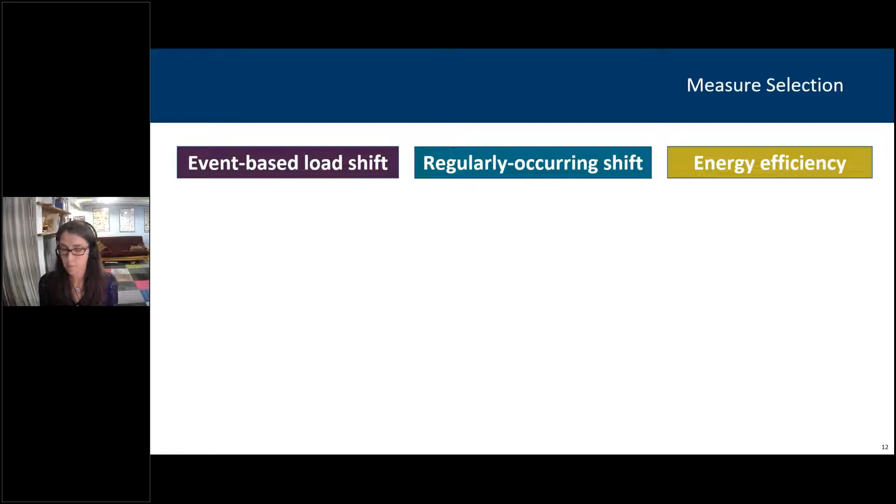An event-based demand reduction measure is one that sheds energy on select days at select hours. For example, with smart thermostats and demand response control, a utility can call an event that reduces the cooling in a person's home for a set period of time. These events aren't typically called daily, but rather a number of times throughout the year, and more detail on that in a second.

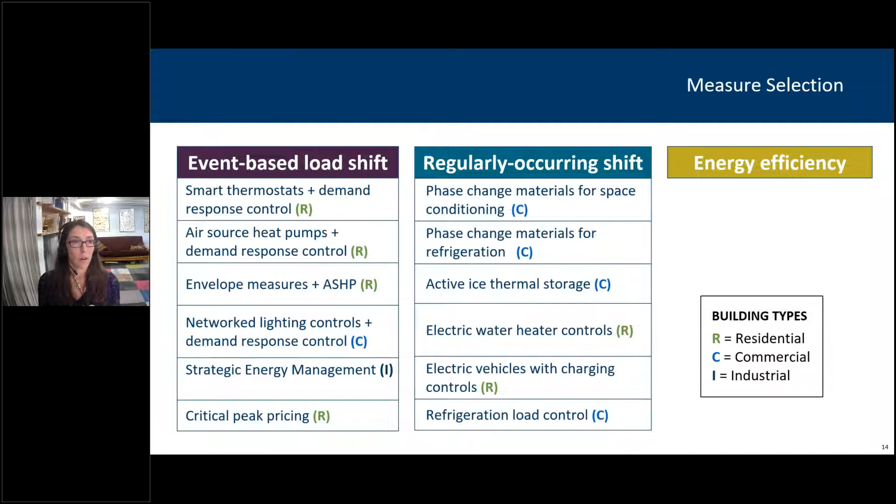This regularly occurring shift is one that can shift energy use in a consistent pattern each day. For the phase change materials for space conditioning, for example, the system is set up such that the phase change material is used on a regular basis for a predetermined set of time. I wanted to mention that these first two categories are similar to the shift and shed taxonomy introduced by Berkeley Lab a few years ago, but the key distinction here in our study is the frequency with which the demand change occurs—either consistently across the year in these regularly occurring shifts, or for a handful of events throughout the year.

And finally, the two energy efficiency measures here have no load shifting potential and save energy daily. Pretty straightforward—they were included to represent measures currently in the Minnesota efficiency programs and efficiency programs across the country, really.

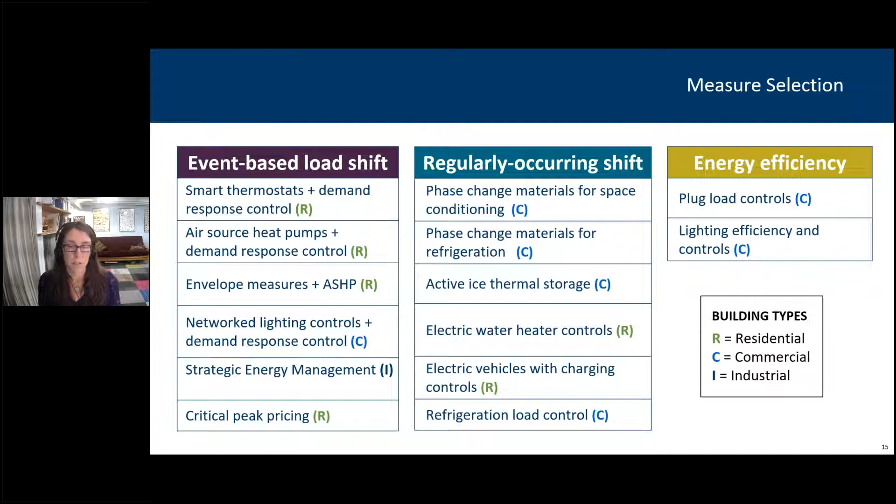So in the next few slides, we show you the definitions of each measure. Not going to bore you—I won't read them one by one, but they're here for your reference if you download the slides. But I do want to point out a few things.

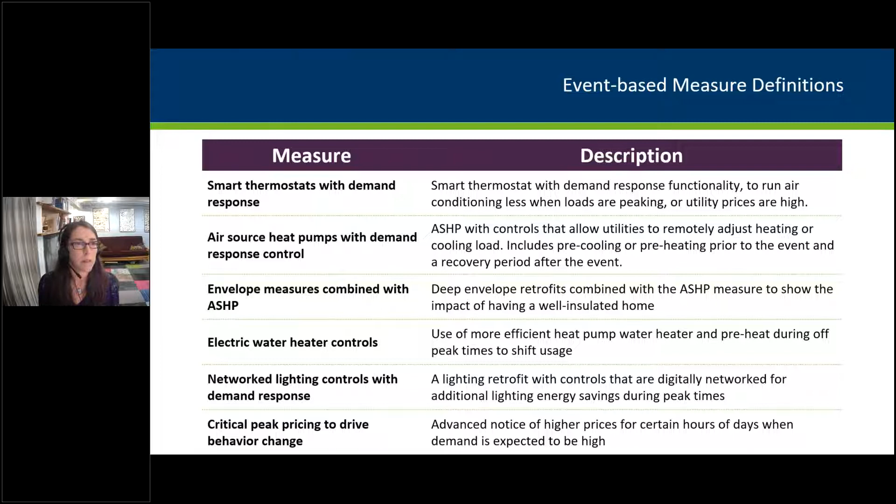For these event-based measures, like I mentioned, there's a called event for each measure. I want to point out that some of them actually have an efficiency component as part of them. For example, the baseline for the air source heat pump: the measure is the air source heat pump with a demand response control, but the baseline for that is an electric resistance heater. So while the event itself saves energy, so does the efficiency gain from going from a lower efficiency heater to a higher efficiency heater in the air source heat pump. And the implications of that will become clear in a little bit.

So now for these regularly occurring shifts, I want to point out some innovative technologies that are commercially available but on more of the cutting edge, such as those phase change materials I mentioned earlier. Those materials are melted and frozen around a set point to shift load in both conditioned and refrigerated spaces.

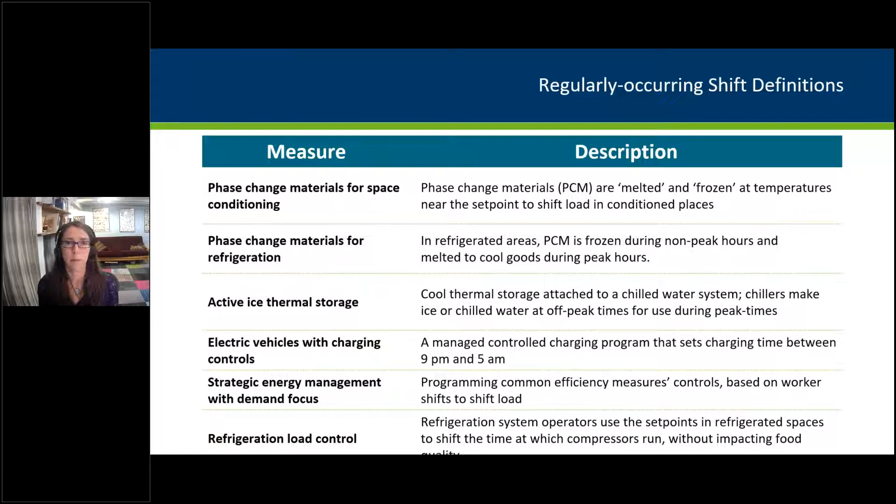There are also measures in this category that are very controls-based, like electric vehicle charging, which includes a managed control charging program, as well as refrigeration load control, which shifts compressor runtimes without impacting food quality. All of that is controls based.

And finally, the two efficiency-only measures are listed here, but they're pretty straightforward as measures go.

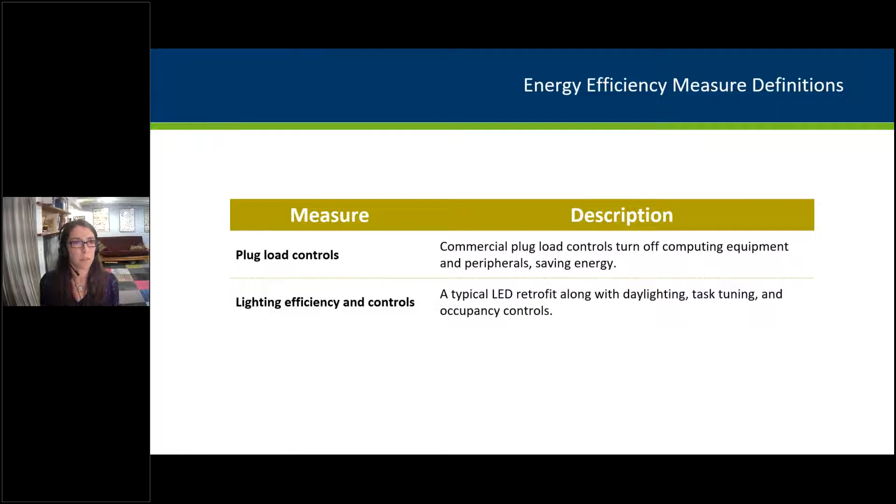So for each measure, we developed both an hourly baseline and a measure load shape. To collect the necessary data points for the development of those load shapes, we relied on a mixture of empirical data from technology field tests conducted by Slipstream and the Center for Energy and the Environment. Where empirical data was unavailable, which was the case in quite a few measures, we used secondary data combined with Minnesota-specific assumptions and energy modeling to estimate hourly load shapes.

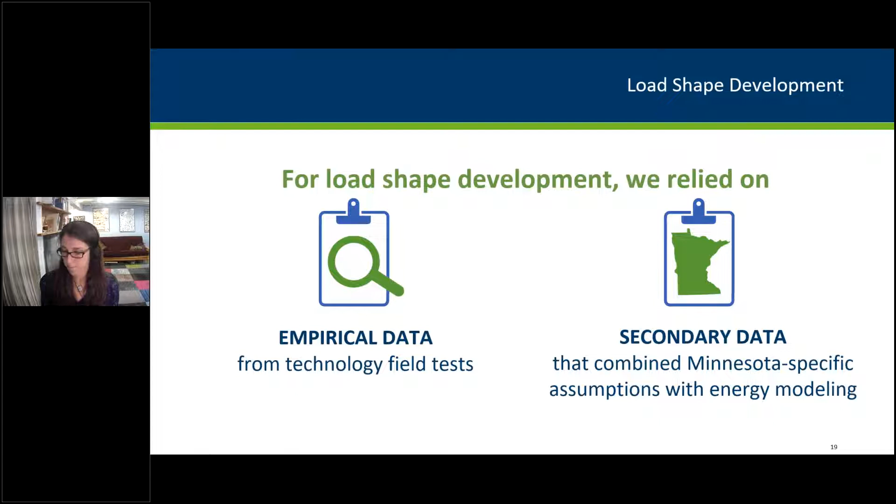So I want to mention this one part of our study and focus on it for a minute or two. To create comparable results across different types of measures, we scaled each measure to achieve peak savings of 500 kilowatts at some point in the year.

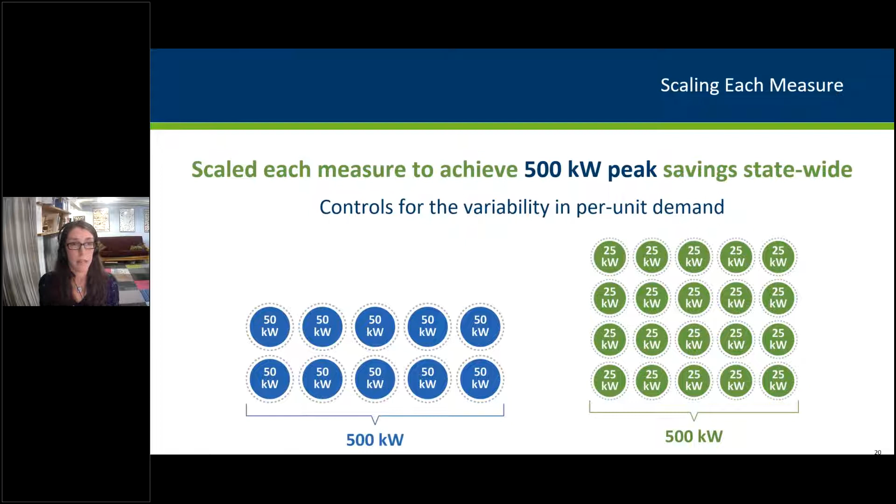One measure has a per unit demand savings of 50 kilowatts, and one has a per unit demand savings of 25 kilowatts. They both add up to 500 kilowatts, but the total number of participants is 10 on the left and 20 on the right. They both reach 500 kilowatts of demand savings for at least 1 hour throughout the year, and that's what we end up comparing in our results. This allows us to have a more apples-to-apples comparison across measures.

So in our model and analysis, we had two levels of what we're calling optimizations that drove how the load shifting occurred: a price optimization and an emissions optimization. We first optimize around price, similar to how utilities currently promote demand response programs.

As high prices typically occur in the middle of the day right now, this corresponds to a shift of energy use away from the middle of the day. Regularly occurring shifts did this on a daily basis, while event-based shifts did this on the top 20 days in the year in our model. Those top 20 days were identified by looking through the prices in our data sets.

The emissions optimization similarly looked at how the results may change when shifting load around the level of emissions. For regularly occurring shifts, we ran both a daytime and a nighttime scenario, as emission patterns change based on those time frames. The event-based shifts were again modeled to shed energy during the top emissions hours on the top 20 days of the year. And of course, energy efficiency sheds energy all day.

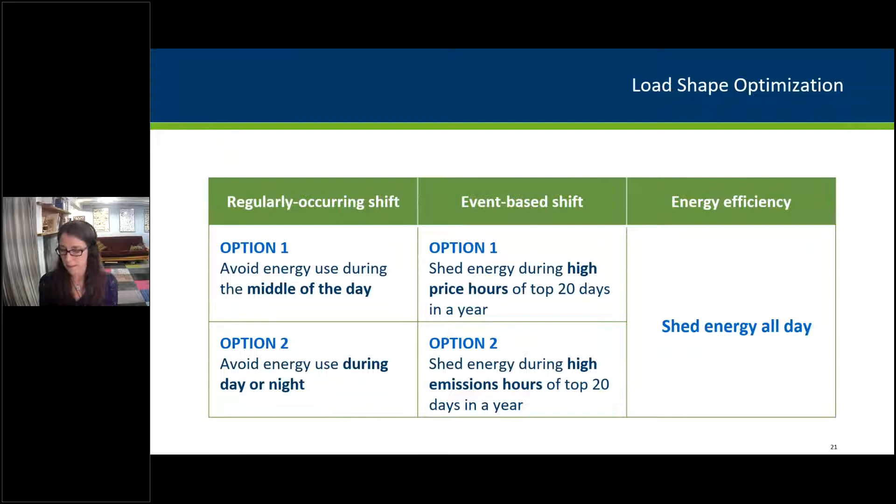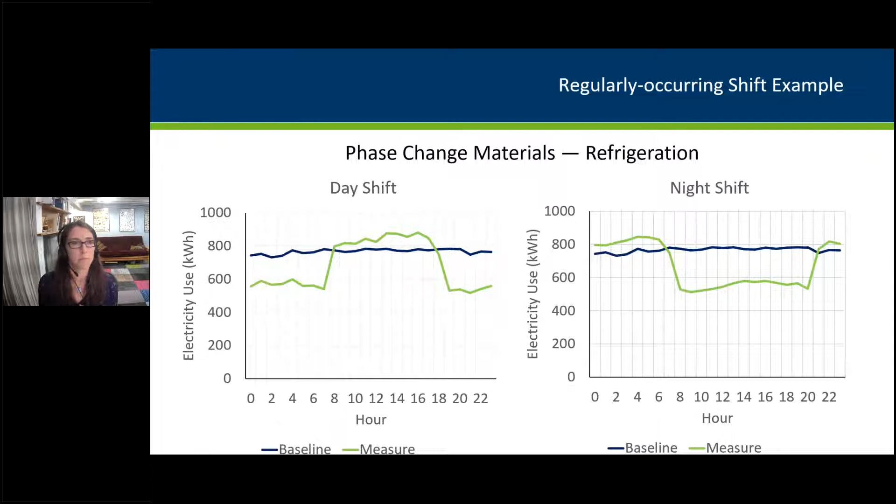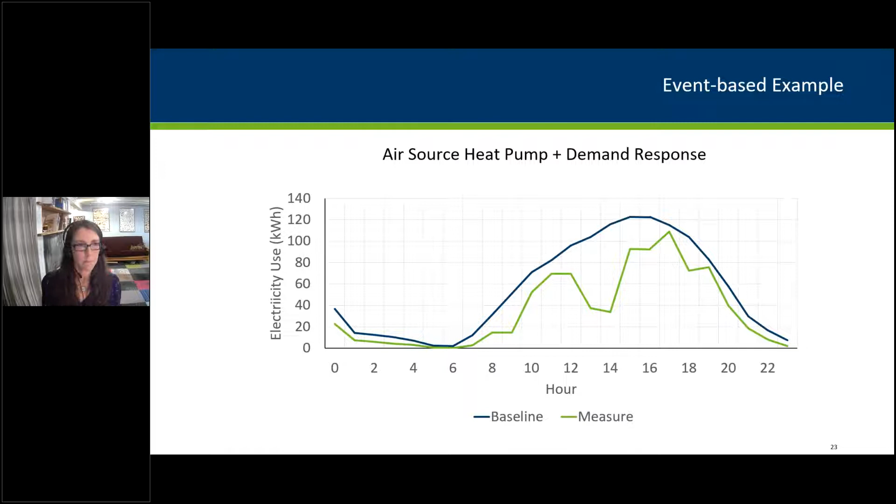So finally, in terms of background and approach, I want to make note about our cost and emissions data sources. There are a number of levels of information that we use in our model, and we get into this in much more detail in our report, and you'll see where this comes into play in our results. For our cost data, on the left side, we use current Midcontinent Independent System Operator, MISO, market data for current day prices and fuel mix data. We tried, but were not successful, in securing future data on the MISO market.

We use statewide data for current and forecasted emissions, which includes EPA hourly emissions and known future retirements at the time of our research. And finally, we applied Xcel Minnesota specific utility data for current and future costs and emissions, which was based on their integrated resources planning data. I want to take a moment to extend a big thank you to Xcel for working with us to provide these data, because it really helps strengthen our results.

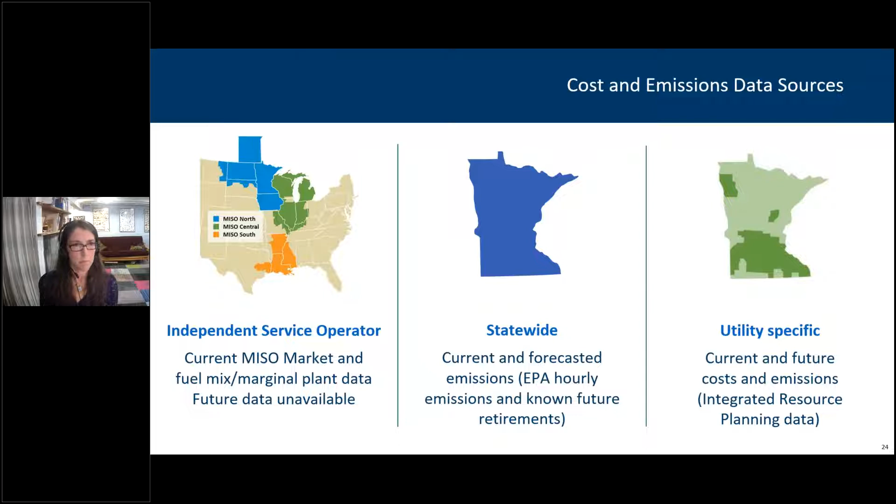So there's a lot more detail. I know I just went through a lot of detail, but there's a lot more detail in our report about other load shifting measures, about load shapes and assumptions. But in the interest of time, I'm going to pass the baton over to Maddie, who is going to go over some of our results.

Thanks, Jeanette. Before we dive into the results, I want to provide a few additional backgrounds about the price optimization scenario. So the general goal for price optimization was to shift load away from time periods with high cost towards time periods of low prices or low cost, which generally corresponded with shifting energy use away from the middle of the day and towards the middle of the night.

We modeled all 14 of the measures in our study in this way, and we also modeled them against 3 different time periods in order to understand the differences we might expect to see in the future when the grid is a little cleaner and the generation mix may result in different price profiles.

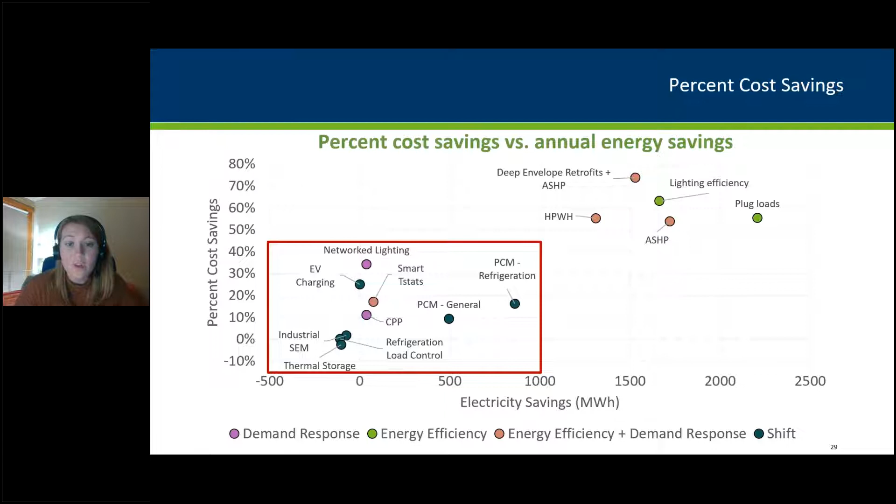This is largely related to electric vehicles' charging ability to shift load from high cost periods of time to low cost periods of time. Now let's break down this cluster a little farther. I wanted to zoom in on 3 measures that have an energy penalty, meaning that they use more energy throughout the year than they save.

Although these 3 measures are highly clustered, they do have significantly different results. Industrial strategic energy management is able to have a small percent cost savings, while refrigeration load control is largely cost neutral, and thermal storage has a small but negative percent cost savings. This is again related to how well they're able to shift energy away from those high cost periods.

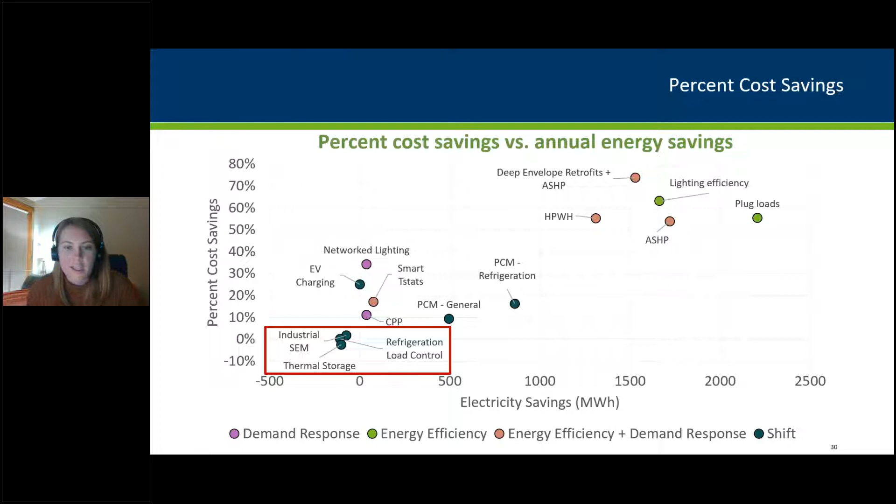One key takeaway is that electric vehicles have the highest percent cost savings. As I mentioned earlier, this is particularly striking as electric vehicles are energy neutral, meaning they don't save any energy throughout the year. The primary reason for this is that electric vehicle charging is able to shift all of its energy use from the top periods of the day, from the middle of the day to the middle of the night, when costs are lower. The rest of the measures have performance constraints that restrict their shifting ability.

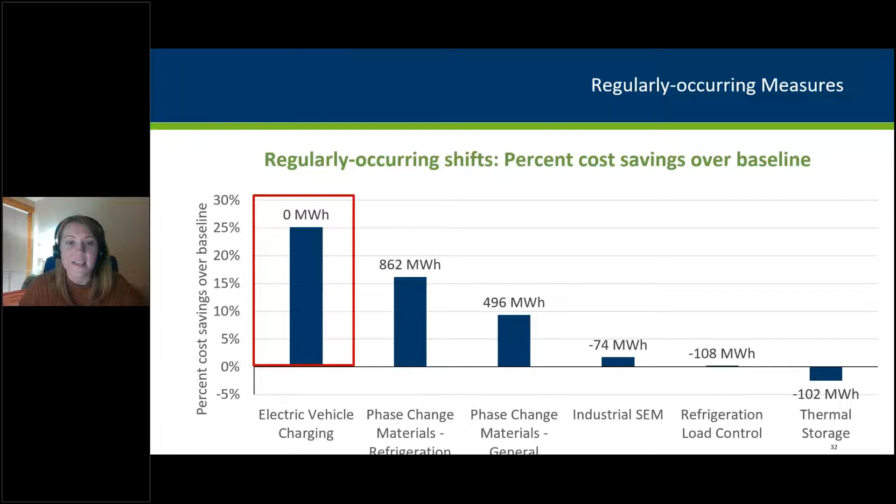For example, if we look at phase change materials, which has the highest energy savings of any of these measures, we see that its percent cost savings is lower. The performance constraint there is that although the measure is able to freeze phase change materials during off-peak periods and then use those during on-peak periods to cool goods instead of using the refrigeration system, the freezing of the materials isn't enough for the entire peak period of the day, meaning that sometimes the refrigeration system still has to be on, and there's some energy use during those peak periods.

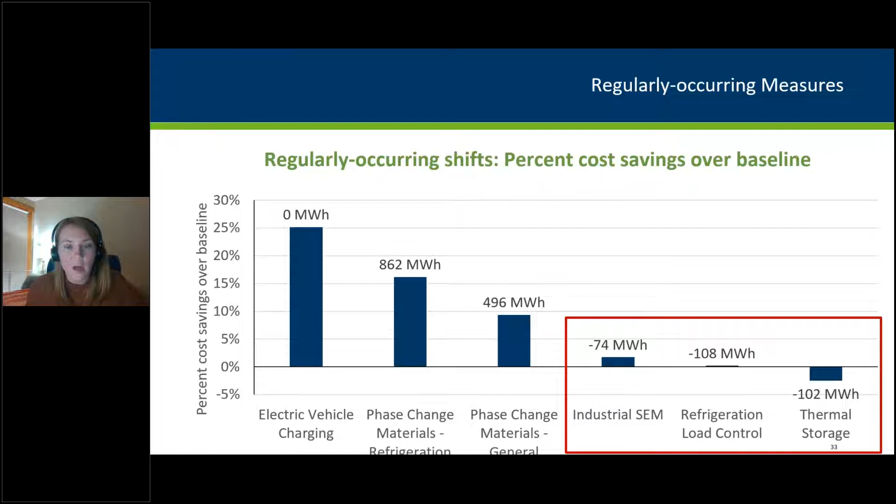The next thing I wanted to point out is just again that some of these measures that have an energy penalty are able to save money. As pointed out earlier, industrial strategic energy management has an energy penalty but is saving money, while refrigeration load control is mostly cost neutral, and thermal storage is not able to overcome its energy penalty to create cost savings.

So what we really see here is that for measures with both an efficiency and demand response component, the efficiency component eclipses any impact we see from demand response. The main reason is that each of these measures, during their events, have a pre-cooling or pre-heating period as well as a recovery period, and that eats into some of the electricity savings and cost savings we would otherwise see from those events.

When we look at the purely demand response measures, however, we see that they are able to generate significant cost savings. The reason is that they don't have to have a pre-use or recovery period, and are instead able to just shed energy use during the event, creating more substantial savings.

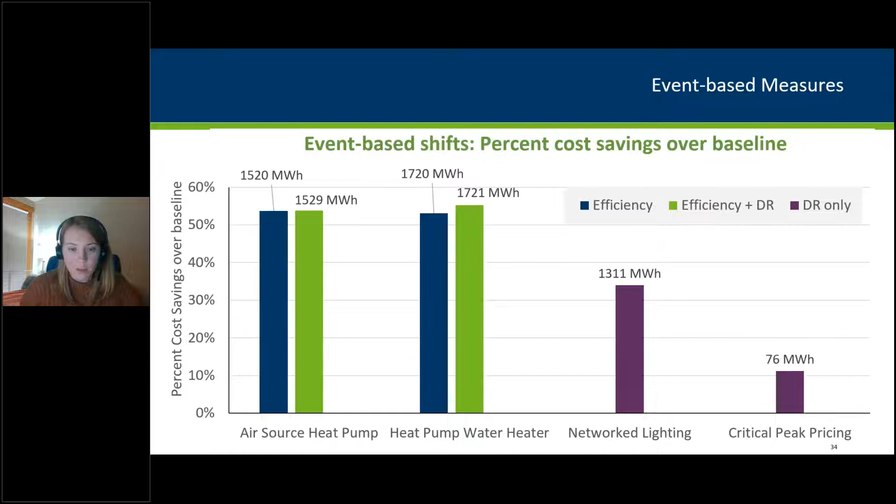So that summarizes our energy cost results for the present day. In addition to energy costs, we also looked at the impact of these measures on capacity cost savings. Capacity cost savings are generally defined as the delay or deferment of the need to build a new power plant or new transmission and distribution.

It illustrates that purely demand response measures, such as networked lighting, and load shifting measures, such as electric vehicle charging, have a significant amount of their cost savings coming from capacity savings. This is largely due to the fact that they're able to shed energy use at the peak very effectively and generate significant savings from that.

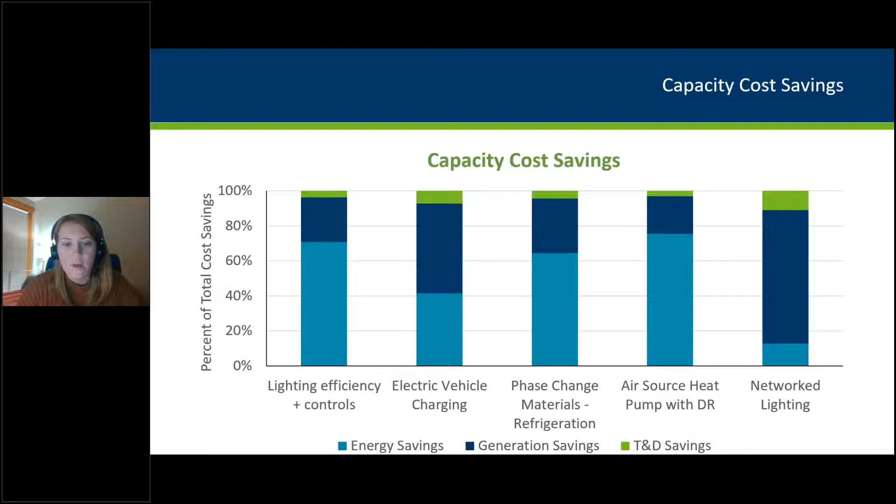I'm not going to go into a lot of detail about the other results from our price optimization, mostly in the interest of time, but I will say a few more things here. First of all, for our future model projections, we see that most measures have mostly stable percent cost savings across time. This is especially true for those measures with large energy savings across the year. The exception is regularly occurring shifts, which experience a decline in cost savings across time.

And the reason for this is that we keep our shifting methodology the same for future years, meaning that we're still shifting energy use away from the middle of the day. But in future years, we start to see more renewables enter the grid, and prices in the middle of the day start to be lower than prices in the middle of the night. And so that erodes the percent cost savings that we see. However, if you change the shifting methodology, you should be able to get similar percent cost savings across time.

The second thing I want to talk about are carbon emission savings. And here we also saw that most measures are able to save emissions compared to the baseline, even when we're optimizing on price. The main reason for this is that carbon emissions are also lowest in the middle of the night, similar to how prices are. The exception to this are those measures that have an energy penalty, such as industrial strategic energy management, refrigeration load control, and thermal storage.

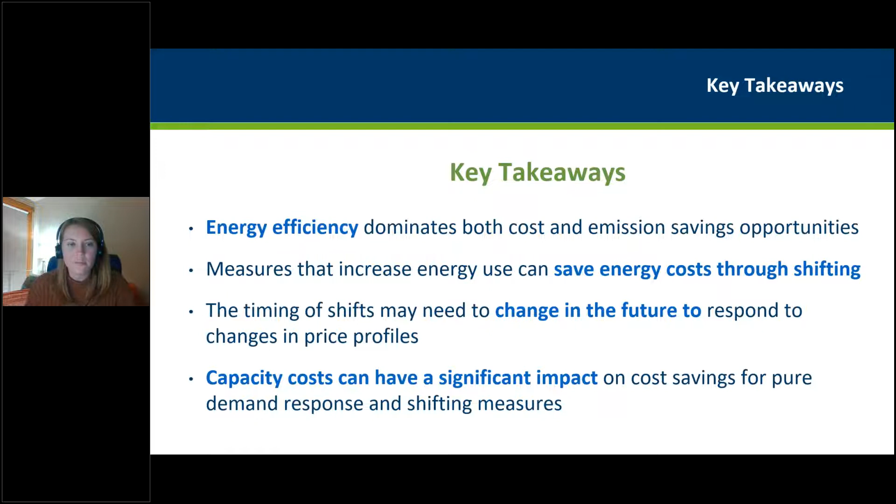At this point, I will pass it over to Ravi to talk about our emission optimization results. All right, thank you, Maddie.

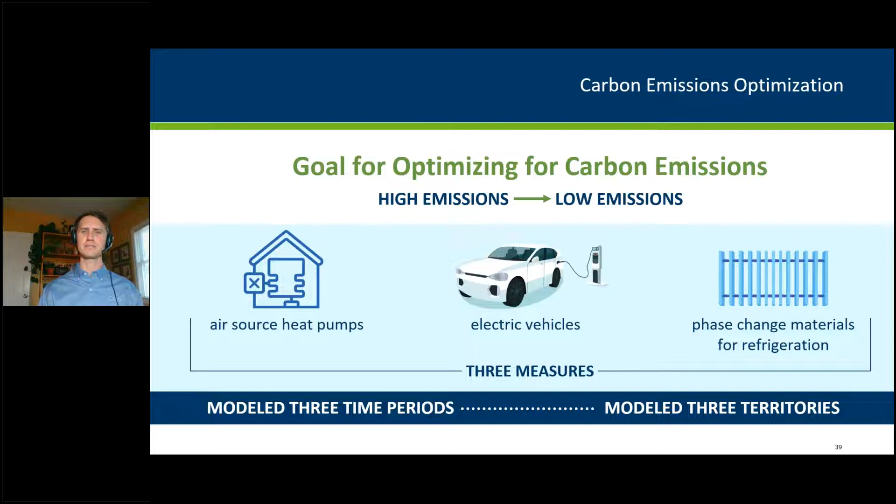Second, as anticipated, average emissions in Minnesota will decrease 60 to 70% between now and 2034. This reduction varies depending on which forecast is used because of the number of coal plant retirements and the fact that coal is a baseload fuel running for a high number of hours throughout the year. Finally, it is worth noting that in all years, Xcel Energy's emissions factor is lower than the statewide average, which is a result of its specific fuel mix.

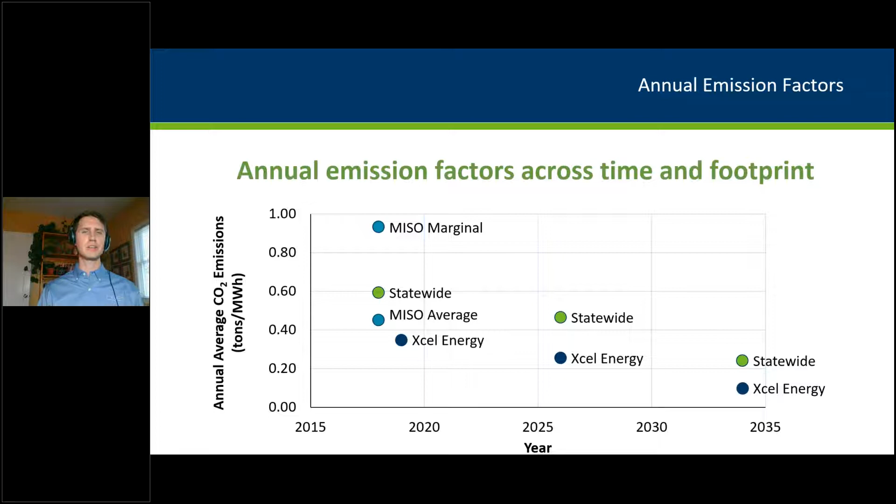The heat pump event-based load shifting measure has the highest emission savings over the baseline out of all the measures in this study, which is a result of the energy savings from switching from electric resistance heating. Even so, the differences between these years is relatively small, ranging from 54% to 57% savings.

Similar to the results from the energy price optimization scenario that Maddie covered, the incremental average emission savings from deploying demand response is negligible. This is because these demand response events happen only 20 times per year, and the length of time available to shift these thermal loads in a typical Minnesota home is only 2 to 3 hours, which does not provide significant emission changes.

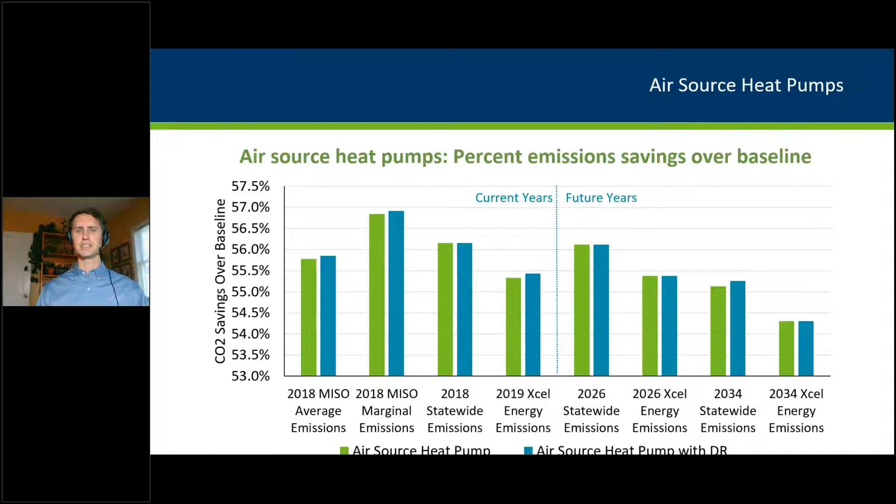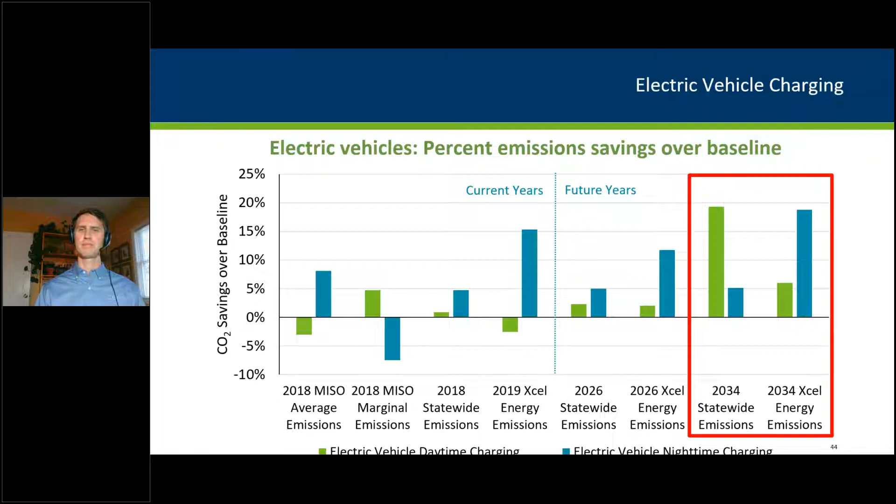And finally, these results also demonstrate that emissions patterns may vary utility by utility. In 2034, our statewide emissions forecast favors daytime charging, whereas Xcel Energy shows higher carbon savings when load is shifted to nighttime charging. In terms of takeaways, it really depends on what grid region is chosen to demonstrate carbon savings.

Currently, there is not a significant difference in average emission savings, whether optimizing on price or emissions. With that said, there is a difference in marginal emissions. In the current grid mix, shifting usage to the daytime saves more emissions but has a negative impact on prices. Marginal daytime emissions are lower right now, mostly due to natural gas generation. Nighttime emissions are higher because of must-run coal plants.

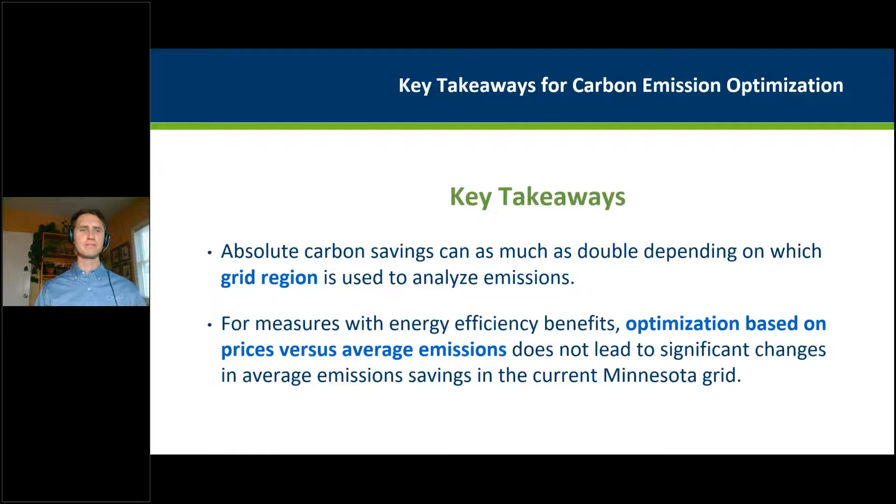And now I'll turn the presentation back over to Maddie for high-level takeaways for the project. Great, thanks, Robbie. So that brings us to our key set of recommendations for integrating these measures into programs as well as for future research on this topic. The first three recommendations are program recommendations that work to accelerate load shifting behavior.

The first is to integrate measures that shift load and save energy into CIP portfolios. Measures like phase change materials for refrigeration both save energy and shift load, generating multiple benefits and fitting within the current regulatory framework in Minnesota. The second recommendation is to bundle load shifting measures into portfolios to create energy saving opportunities. Our results show that there is ample opportunity to save carbon and money from these measures and that they should be pursued.

The third recommendation is to consider future rate designs that incentivize customers to shift energy when the system is near capacity. Although our study did not explicitly look at the impact of rate design, vast research exists that shows that rate design does influence customer behavior and shifting. In the future, these rates could reflect carbon and encourage customers to shift energy use away from high carbon times.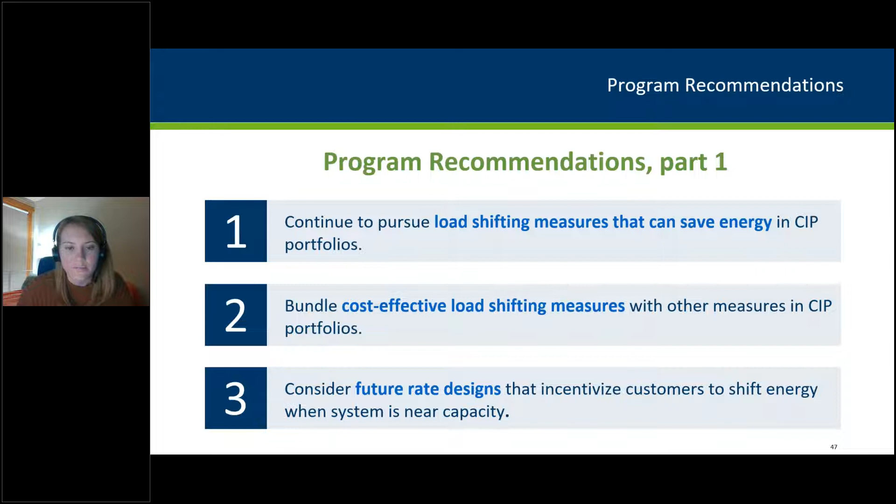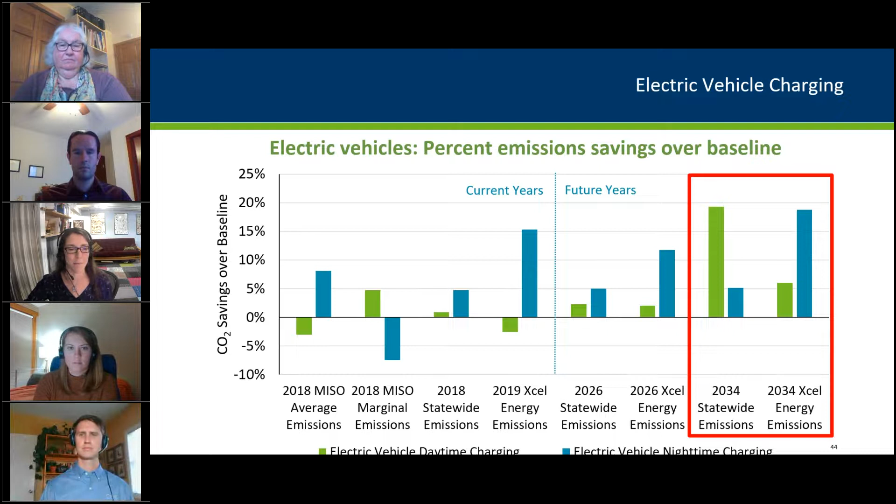The only thing I'd add to what Maddie mentioned is that I don't think we have the detail to know exactly what's going into Xcel's forecast. There are a lot of unknowns here. But if there are additional questions we haven't answered, even as we answer them here, feel free to follow up. I'll just pull up our contact slide again.

Yeah, we actually have about 7 questions come in that we haven't gotten to, but I see that we're 5 minutes away from our time on the webinar. So maybe following up on some of these offline would be good. Just one more question, I think: what would you say is the single most important takeaway from the results of this study?

From my perspective, I think this study aligns with other research happening across the country, showing that load shifting does have a benefit across a number of measures—even those that are pure load shifting versus those that have an efficiency component. I think our study shows there's value to all of those, and as Maddie went through our recommendations, it would benefit from exploring more how regulatory structures could address promoting those benefits, or weighing those benefits and costs.